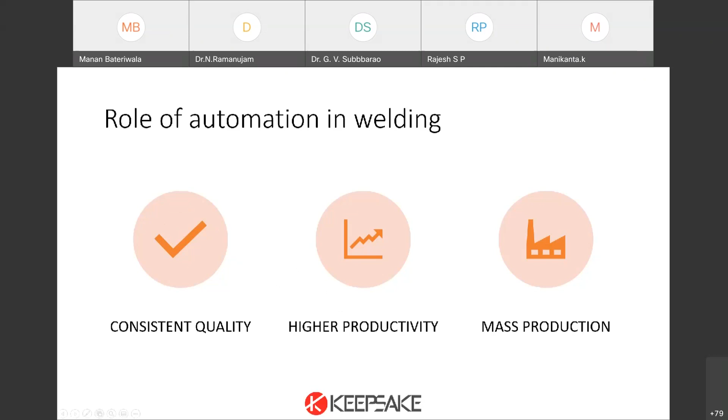Now, how is this automation divided? What are the different levels of automation? First of all, whenever we think of automation, we start with the thought that there would be a robot with 2 hands, or some very sophisticated machine carrying out this process. Not necessarily. Welding automation is divided into different levels. You have a very simple entry level machine. You can simply keep one job on a rotary turntable, fit a torch on a holder, and rotate the job. It can weld. That is an entry level system. It solves the purpose. It gives you a huge amount of productivity.

But there are certain joints which have profiles, which have specific contours to be followed. That is where we go to robotics. And you even have a robotic or a custom designed manufacturing line implemented for bigger components. So let's take an example of entry level automation machines.

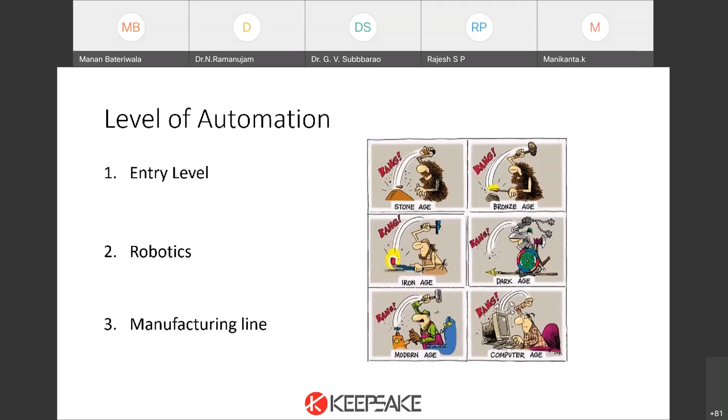So when we say entry level machines, as I said earlier, you have simple rotary tables attached with holders, which carry out the welding joint. Here the angle setting, weld parameter setting, everything has to be done manually. The positioning of the job has to be done manually. The only thing that is negated is the welding process. You simply have to press one button, the job rotates, or the job goes in a linear motion and welding is carried out. So the first example here we'll take is of the linear welds.

The linear weld tractors are majorly used in long seam welding. Let's say we have to do butt welding and we have two long plates which have to be butt welded. A simple tractor is fitted across the length of the joint and the torch is moved in a specific direction, and the welding is carried out. It is a very simple process and not much effort is needed.

The second major place where entry-level automation helps a lot and increases productivity is in shell manufacturing. The shell normally has a very big diameter, ranging from 2 meters to 4 meters. In such cases, the amount of scaffolding needed for a welder to sit near a weld joint is huge and it is very time consuming. So column and boom plays a very good role here. It gives you accessibility at higher heights. It can reach longer lengths. And this is widely used in the industry at present.

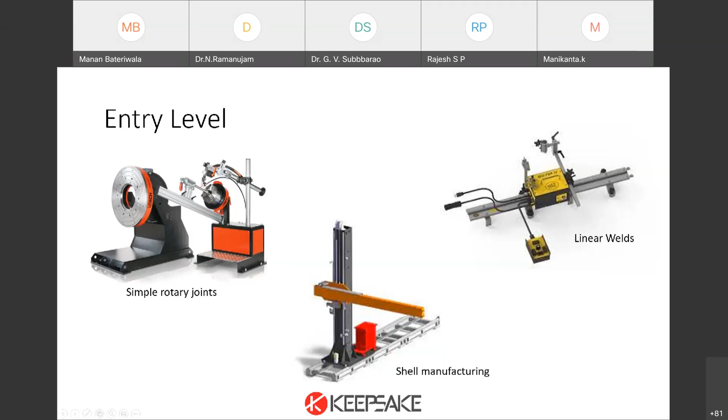Moving ahead, we have robotic automation. Our today's major focus would be on robotic automation, how the cells are designed, and how the process is established. So here you can see an example of robotic automation. In this, a robot is placed on a linear track. The job is held in a chuck. You have again a positioner which manipulates the job and welding is carried out.

Robotic automation is a booming industry at present. On an average in India, 2000 robots are sold simply for robotic welding purposes. The major prevailing welding process here is GMAW or MIG welding because of the process simplicity, easier to manage, and you can get high deposition speeds. The second most adopted process nowadays is laser welding. Again, easy to manage compared to TIG welding.

What happens in the case of TIG welding is you have a certain life of the tungsten electrode. You have to grind the electrode. And all these processes require manual intervention. This reduces the overall throughput.

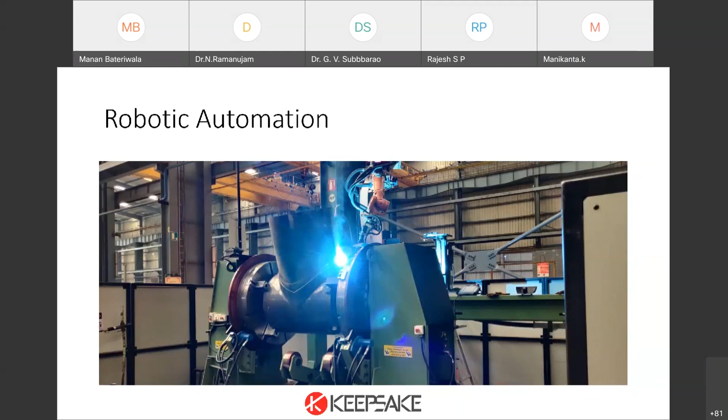I'll be carrying forward to the next type, that is manufacturing line. So whenever you have bigger components, huge amount of weld to be deposited, industries opt for an automated manufacturing line. The prime example here, as you can see, is the shipyard industry. In shipyard, the panels are like 30 meters long, 10 meters in width. The amount of deposition goes into tons. Manipulation of the job is not possible because of such high weights.

So the whole assembly line or the manufacturing line is built around this panel. And automated welding with help of certain softwares, sensing mechanism is carried out. Today, we would also be looking at certain sensing mechanisms like laser seam tracker attached on a robot and touch sense. So this also would be covered later on.

Any questions till now? Okay, then I'll continue ahead. Manan, in the chat box, you are having one question. Yes. Just a second. Open the chat box, just a second.

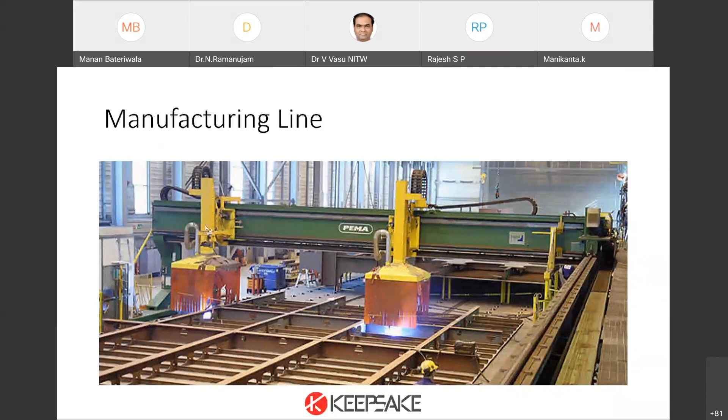So, how is a robotic cell designed? Whenever we design a robotic cell, three parameters are major: the geometry of the job, the weld joint designing, and which process we are automating. Why are these parameters very critical? Let's take an example. If the job is very heavy and too big, the manipulation becomes equally cumbersome. It can be even dangerous because of the weight or the tonnages.

In a different case, if the job is very small, manipulation becomes very hard. Let's say we have to weld a 10 mm circle. So though the joint is very small, welding a 10 mm circle is harder to achieve than welding a 100 mm circle, because the amount of precision required by a robot is higher when we have to weld smaller joints compared to bigger joints.

The second part here comes understanding the welding joint. Welding can be carried out in 6G positions, or 6F positions, however we look at it.

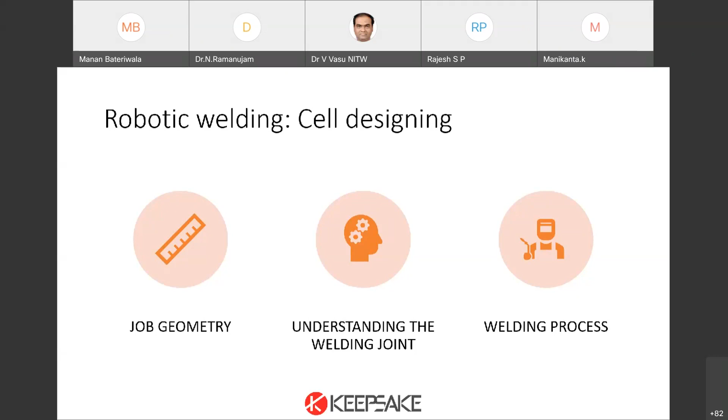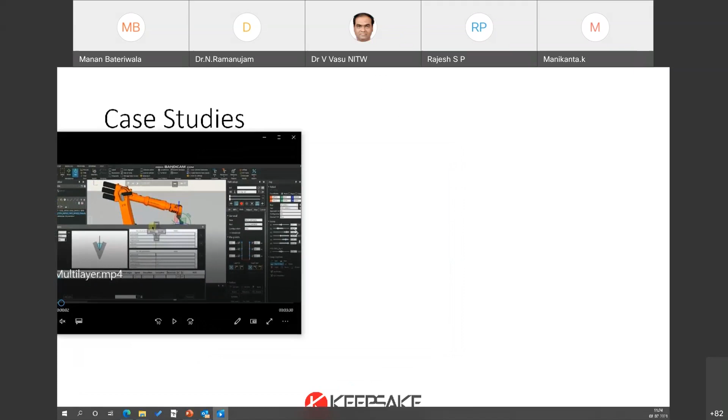Now we will understand this cell designing through some case studies. So the first case study for today is of nozzle welding. This was one of the projects that we carried out. Just open up the details. Okay. I'll give you a brief idea of this weld joint.

So if we see this weld joint, this is a boiler joint. In boiler, it comes under ASME Section 5 pressure vessel joint. The thickness varies from 25 mm to 150 mm. The welding has to pass the NDT requirement of UT as well as PT. The criticality in this weld is the profile groove. The profile design is hyperbolic paraboloid.

So the weld starts with a 2G joint position, goes to 1G, then again comes back to 2G and shifts to 1G position. So during one weld seam, the welding positions are continuously changing. That is the primary concern: how can we manipulate the robot? How can we get the accessibility for such weld joints? Because maintaining the welding angle is also critical.

If we do not maintain the welding angles, the issues that can come are sidewall fusion and improper bead overlap. Improper bead overlap would lead to failures in visuals. So these are the two primary concerns.

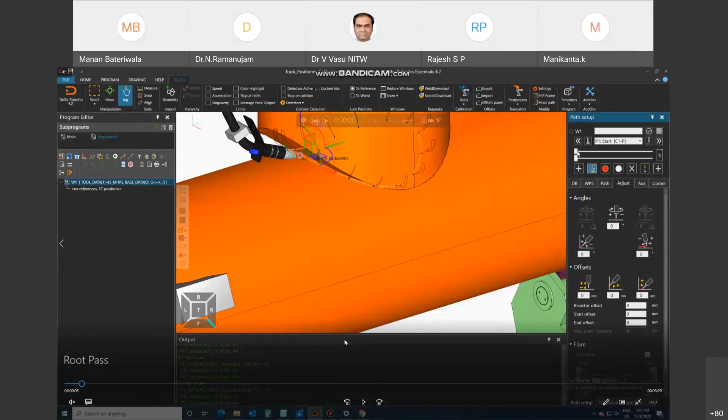In this video, we will be observing how the robot torch is manipulating around the welding joint with the given angles, what controls we have, and what tweaking we can do in a cell. So as we see here, with the job, we can change the angles. That is our weld angle. The torch is fouling at present. So in simulation software, we check how we can negate this fouling. During checking, we update these parameters and these angles.

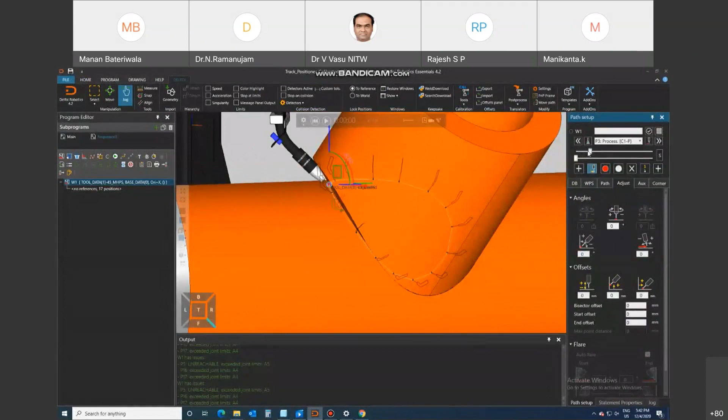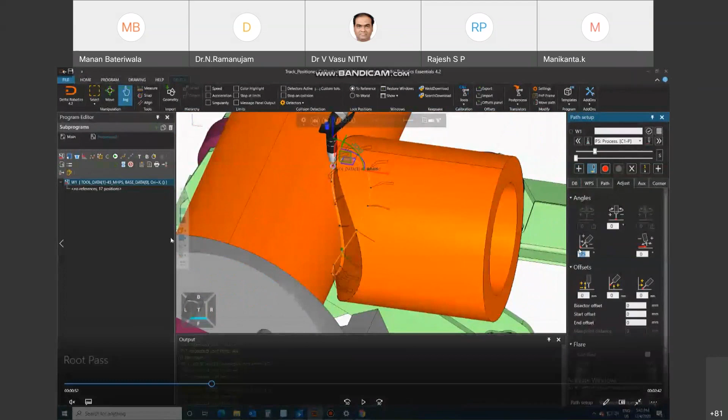The second thing to be observed here is, as the torch is moving ahead, the job is also changing its angle. So the job manipulation and the torch movement are in complete sync. As we can see, when we approach the 90-degree position, the job is in the 1G position. When we started earlier, the job was in the 2G position. So to have a uniform weld, we require synchronized motion between the welding torch and the positioner. If the synchronization breaks, the major issue comes first in the welding speed and then in the positioning part.

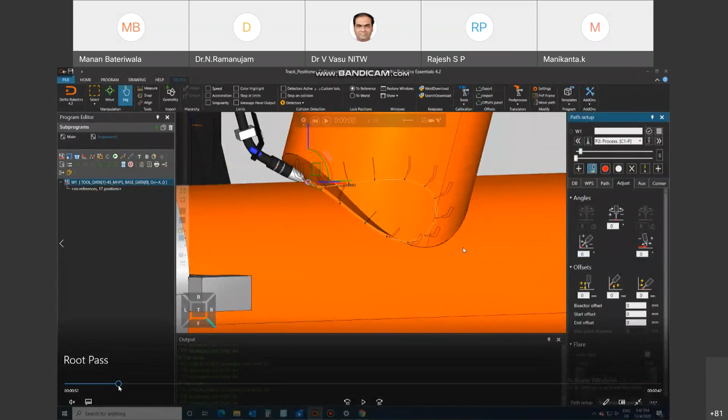So I'll just go to the overview once again. Give me a moment.

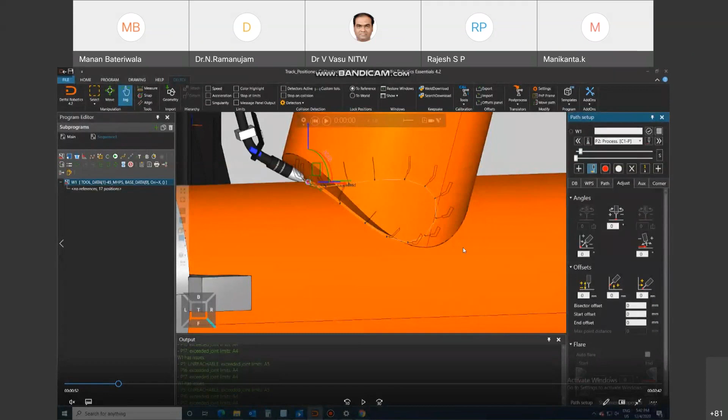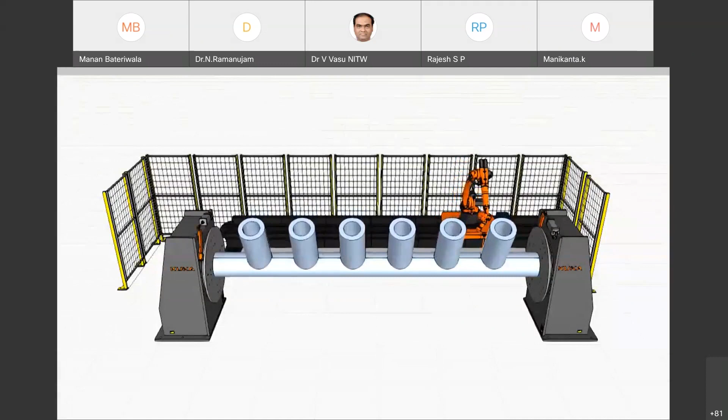So this is how the joint looks in reality. You have a big pipe which is rotated on a positioner, and the robot manipulates around it. The positioner as well as the robot track are completely in sync with the joint. If this sync breaks, the output goes away.

The advantage here is we can weld multiple joints together in a single setup. So even if, let's say, we have reached interpass on one joint, we can simply shift to another joint, weld there, and come back after cooling off that joint. As you can see here, the same joint is traversed repeatedly. So this is multi-pass welding.

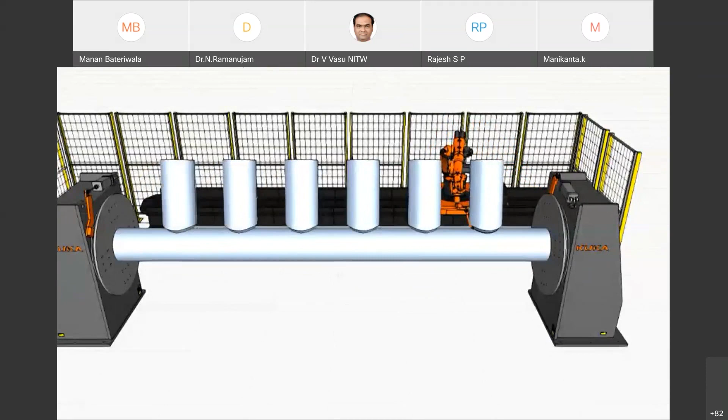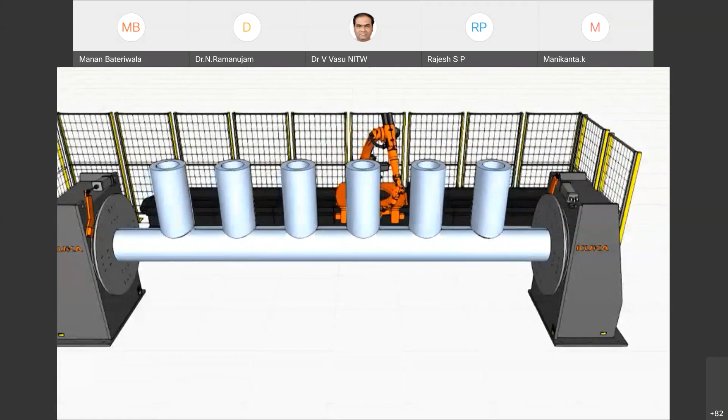As we have thickness, it requires a huge number of weld passes to cover the thickness. I will simply shift to the second joint. As you can see, it does multiple passes on the same. Then, as per the programming and the setup, it automatically shifts to the adjacent joint or the pre-programmed joint. It carries out the welding.

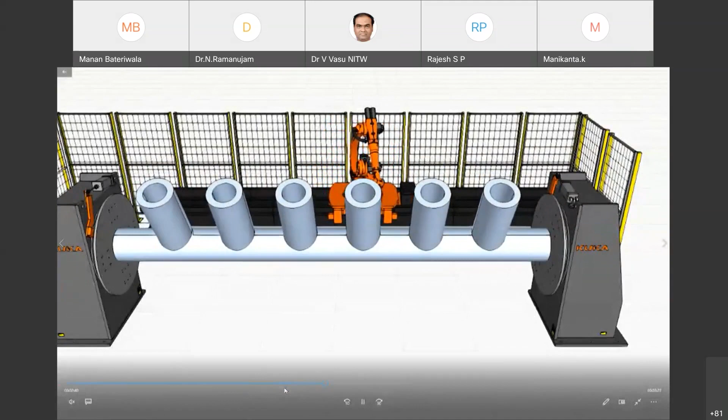One major point here, if you have observed, during the simulation, what we checked is the robot fouling with the nozzle. So whenever during initial setup, initial check, we find such issues, we change the torch bracket, we change the torch angles and re-simulate the whole process. Once the whole process works without any fouling or accessibility issue, this torch design is then passed on to the manufacturer and the torch either is custom made or selected from their catalog.

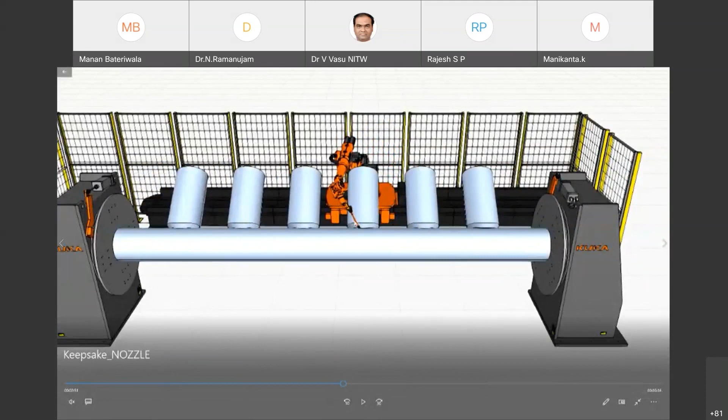Every robotic welding torch is combined with a collision sensor. So behind this, we can see one cylinder, orange color. Yes, I'll try to focus it up. Yes, so this orange cylinder behind the torch is a collision sensor. It triggers whenever a collision occurs. We don't have eyes here. We don't know what is happening. So we have certain safety interlock devices and collision sensor is one of them.

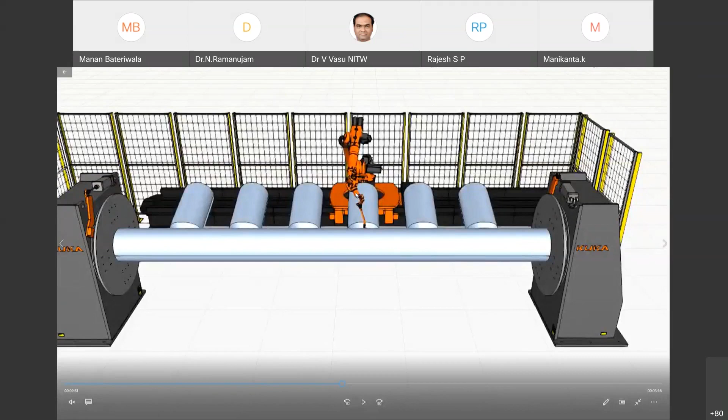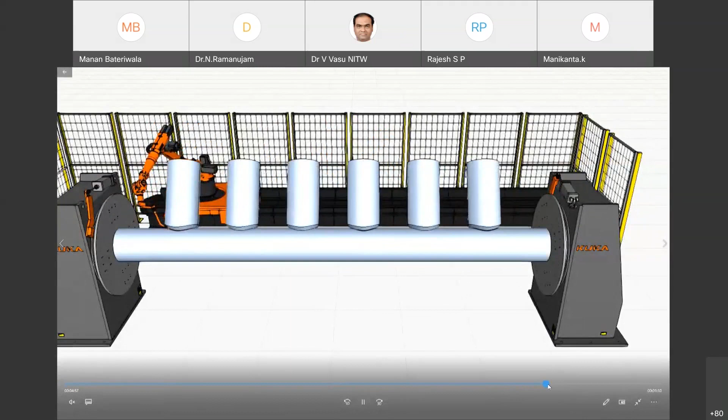Whenever more than certain pressure is applied on the welding torch, a collision signal is generated and the complete process is stopped. This saves the torch from being twisted or bent, and it also saves the welding from going onto the wrong path. So this is how the welding is carried out on the pipe. Just forwarding the video, the same motion again and again.

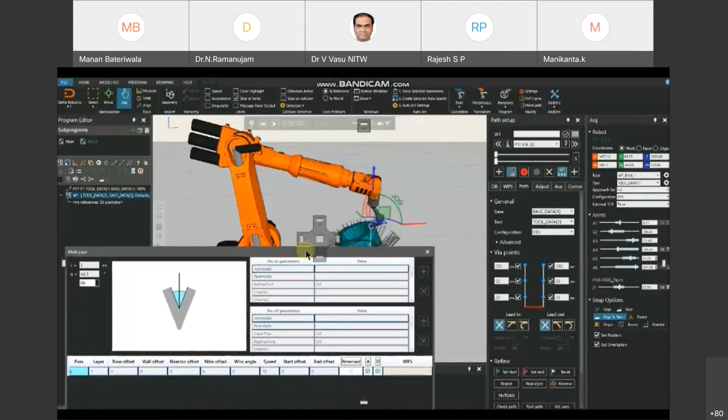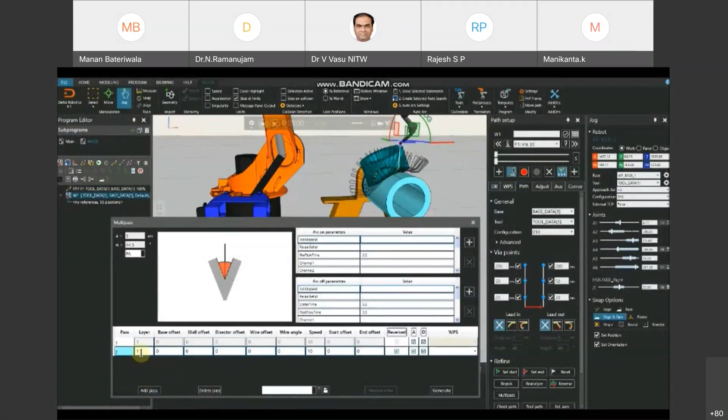Now we will look into how the multi-pass planning is done for this joint. Because when we have high amount of thickness coming down, we have to weld multi-passes. And this is how the multi-pass is planned. So we consider the value of the root pass and provide offsets accordingly. So here, as you can see, we have shown the root pass in the center window. In the multi-pass window, you can simply add an additional pass, give it the required offset in the direction of either base or wall, in reference to the root pass. You can even set the layer number and the nomenclature as per the requirement.

The welding parameters for every pass can be kept different. Even sectoring is possible in case of automation. So for X degrees, we can have certain parameters. For another degree, we can have a different set of parameters being called. So this is how we plan a joint, the different passes within that joint. Normally what we prefer is to create a database and reutilize this database in as many locations or projects as possible. This gives us an advantage of a ready-made set of parameters and faster commissioning time. So this is how the multi-layer.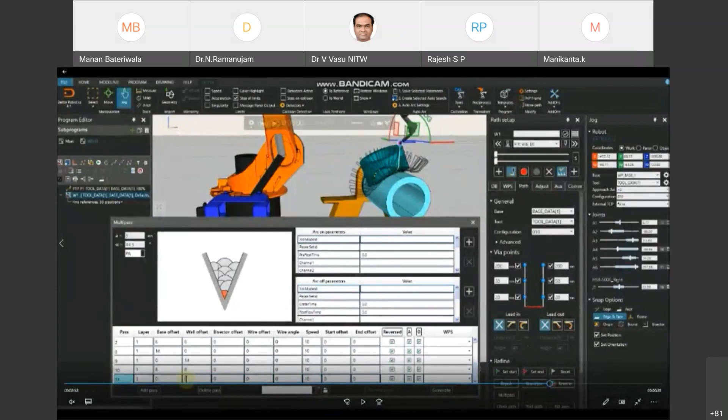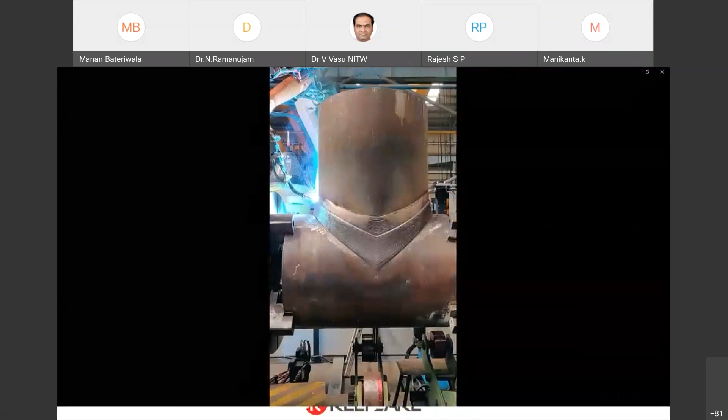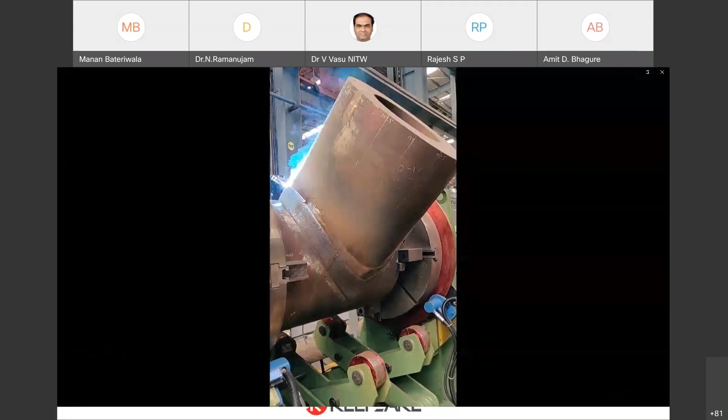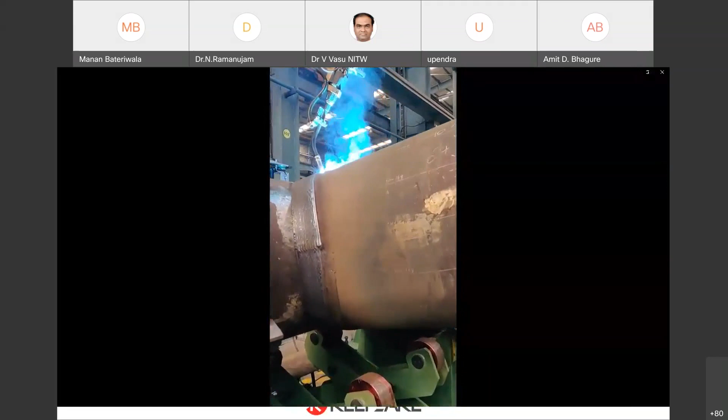Hello, Manan, you are talking. Hello, Manan. Are you hearing me? Yes, sir, audible. Manan, are you audible? Speaking or not? Yes, sir. Audio is okay. His voice, speaker voice is not coming, no? Yeah, video's audio is not coming. He's talking or not? Hello, Manan?

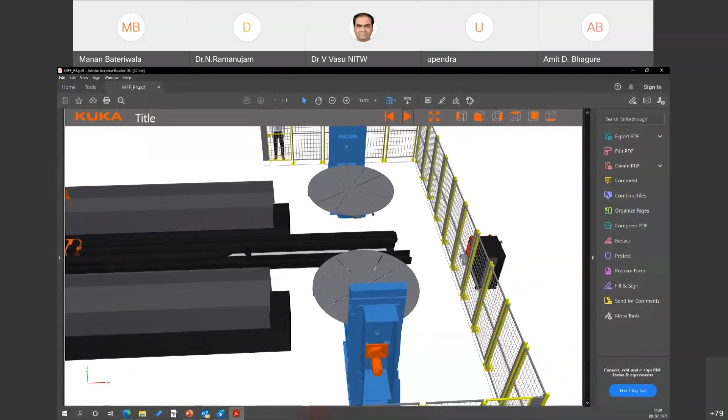Hello, Manan. Upendra, can you hear my voice? Yes, sir, I can hear you. But I think audio from Manan sir is not there. We are trying to call him. Okay, I think he has kept his phone. No, sir, you are still not audible. Sure, sir. Hello. Am I audible now? Yeah, you are now audible. Perfect. Okay. I'll repeat this particular cell design. Little bit louder, you can talk. No problem. Now how is the voice? Yeah, this pitch is okay. Perfect, sir.

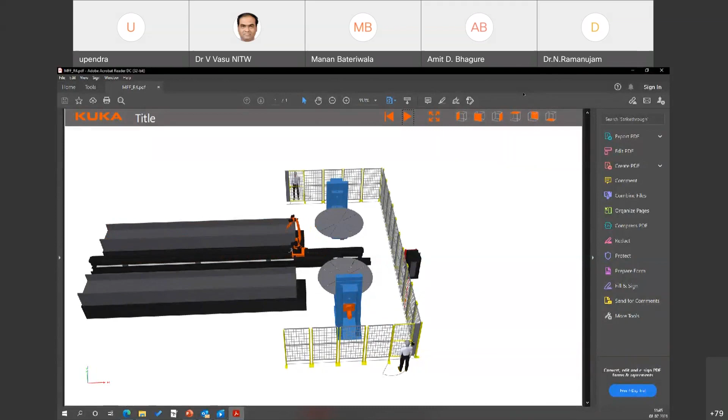Okay. This is an example of MFF, which is an oil and gas company. They manufacture oil rigs for offshore installations. Their major components are volumetric and big in size. And one of the WPS requirements here was that all the welding had to be carried out either in 1F or 2F positions only. So the cell that we designed here was keeping all these factors in mind. We kept the industrial robot on a linear track so that it can achieve longer welds.

This welding can be carried out by entry level automation also. So if we see a simple carriage, a carriage can move in a linear direction and perform this welding. But the advantage with a robot that you get here is when we have higher thicknesses, you can program the multi-pass and this can be implemented. So higher thickness joints can be welded in a single go without any intervention.

Second thing, for smaller components, we have kept a 2-axis positioner. So it has a turn plus tilt option. This helps in positioning the weld piece in the desired angle.

I'll be showing the video of this cell now. So this was the customer's requirement. This is what we then designed in further addition to it. And the installation looks similar to this.

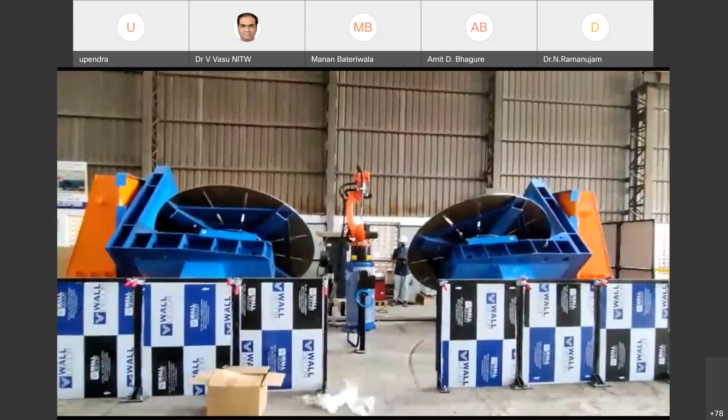The track installation was still pending. So initially when we installed the two positioners, you can see that the positioners are completely in sync. They are in control of the robot. This gives you the manipulation the way we want, the way the process demands. So this is the advantage we get through 2-axis positioners.

Now moving forward to some photographs of this installation.

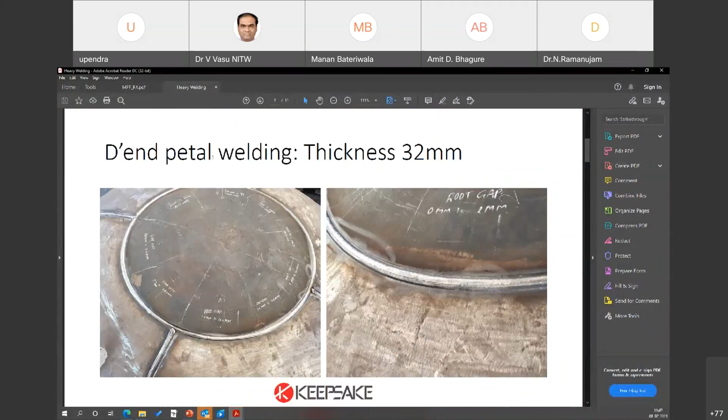So the joints welded on this system, we can weld a D'end petal. We can achieve the angles that we want again through manipulation. A simple butt joint, rotary joints. You can weld pipe to a nozzle, so a circular joint again.

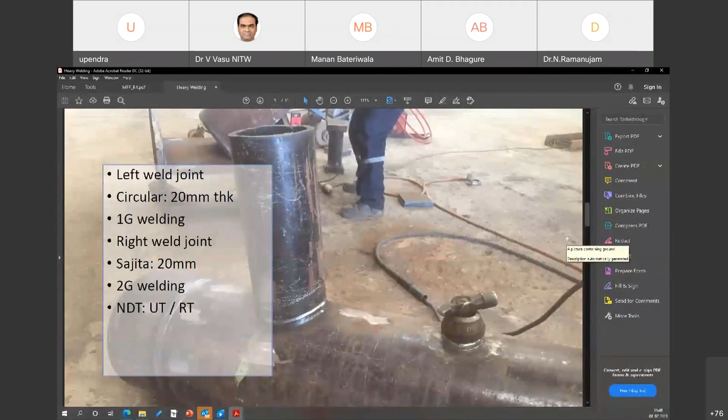You can have connection details mounted on the positioner, similar to I-beams. The major advantage here is that all the weld joints which we are seeing in the vertical direction are also carried out in 1G or 2G position by manipulating the job.

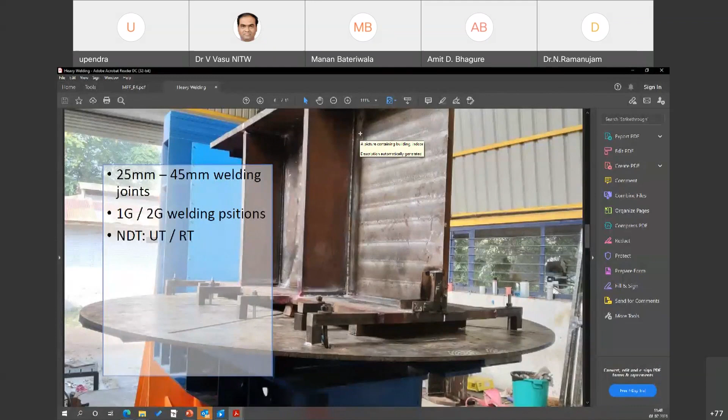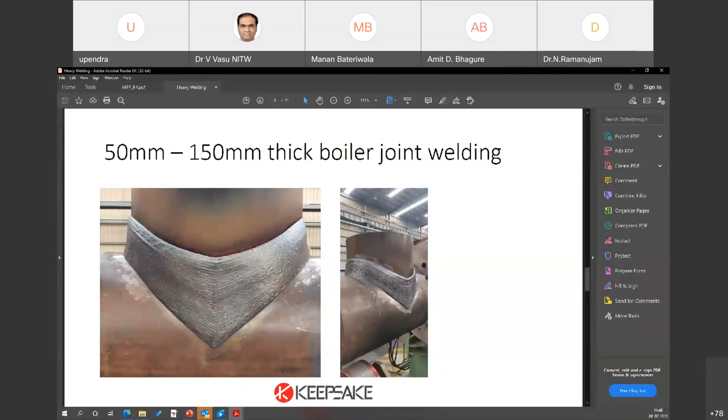Certain nozzle weldolets, yes. So one single system can weld so many different types of joints. That is the degree of freedom and flexibility we can get within this setup.

Now, I said earlier that the system is inflexible also. So if we see the previous case study, such weld joints cannot be carried out on this setup. So every setup is made as per the requirement.

The advantage with a welder is they can weld anywhere needed. They are not bounded by job dimensions, job designs. They are just bounded by the WPS/PQR. That's it.

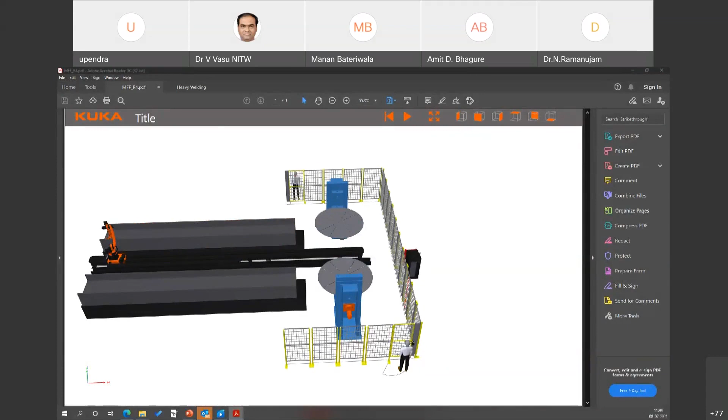Moving forward to the third case study, which is welding in closed spaces. The hardest part is to get accessibility of the joint. There are times when the joint is so far away, or an automation system requires a huge amount of manipulation, a huge amount of hardware, and this increases the overall system cost. So people even opt out in such cases. So reachability is a major concern when we do automation.

Hello, Manan. Once again, your voice is gone. Hello, Manan. Hello. Seems like he's not able to hear us also. You're not able to hear either? Yeah.